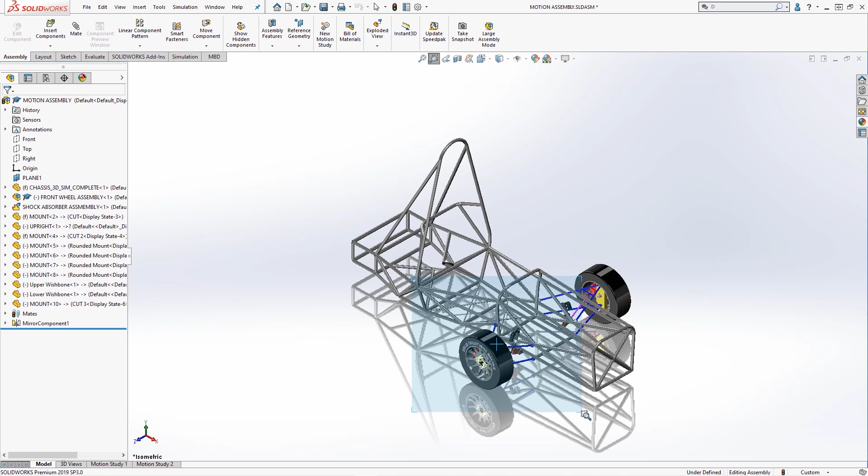Starting with an assembly model, we can focus in on the front right corner of the vehicle and hide the mirrored components. We'll section the model using the front and right planes to make it easier to see the components.

Taking a closer look at the suspension assembly, we see that the double wishbone arms in blue are connected to the chassis. Mounting tabs have been included to mount the orange bell crank rocker to the wishbones and shock absorber.

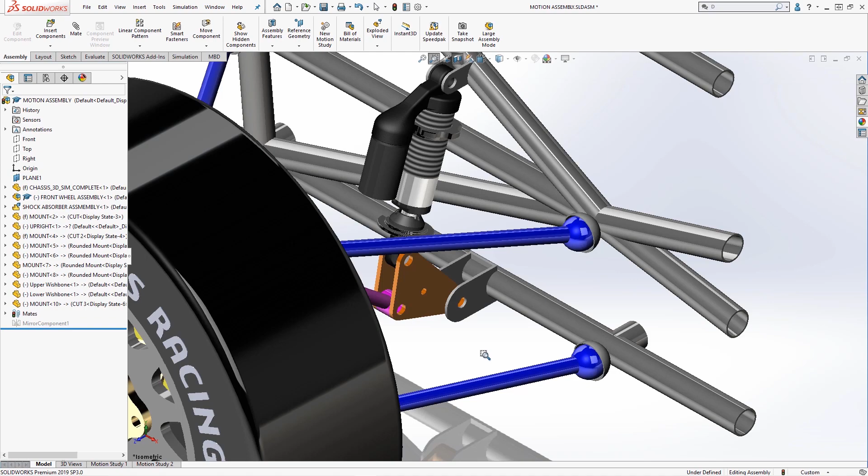Wishbone mounting points have been represented as simplified ball and socket joints for the analysis to allow for a full range of motion. The physical shock absorber spring has been excluded from the assembly, as this can be represented as a virtual simulation element using the simple spring equation, but can also consider fluid damping, thus negating the need to model the geometry.

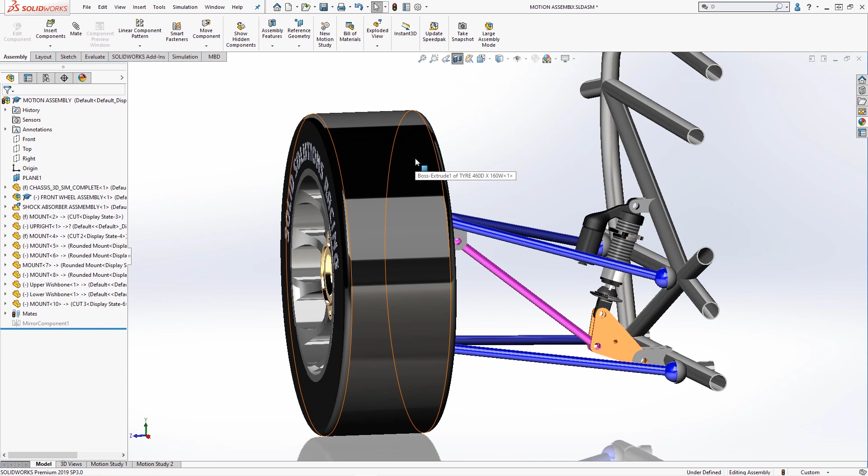We can also see the purple rocker linkage if we rotate around the model, and the wheel assembly itself. Hiding the tyre and wheel, we see a simplified body representing the design envelope for the upright knuckle, shown in yellow.

The brake caliper and hub axles are mounted to this body, which will be optimized in the next section. Ball joint connections are also modelled here to streamline the motion study setup.

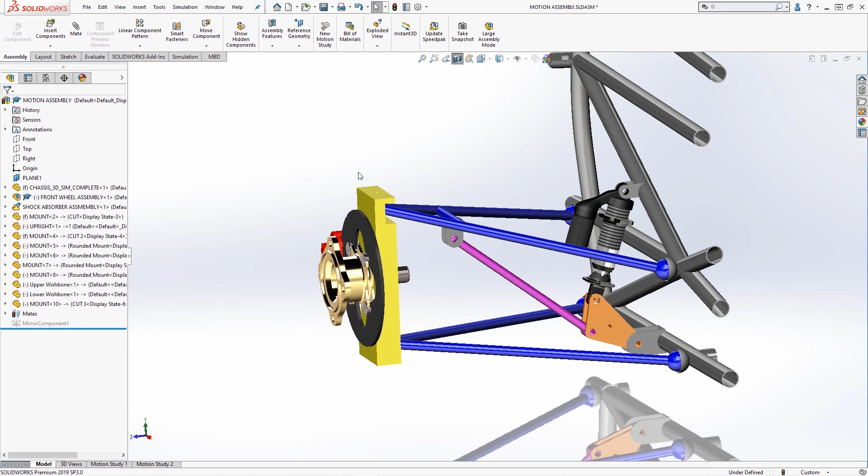We'll unhide the component we hid earlier by using a handy little button on the assembly toolbar, and this completes the geometry review. We can test wheel clearances and suspension travel by moving the wheel to ensure all components are mated correctly. These mates will automatically be converted to motion study joints, avoiding tedious manual setup.

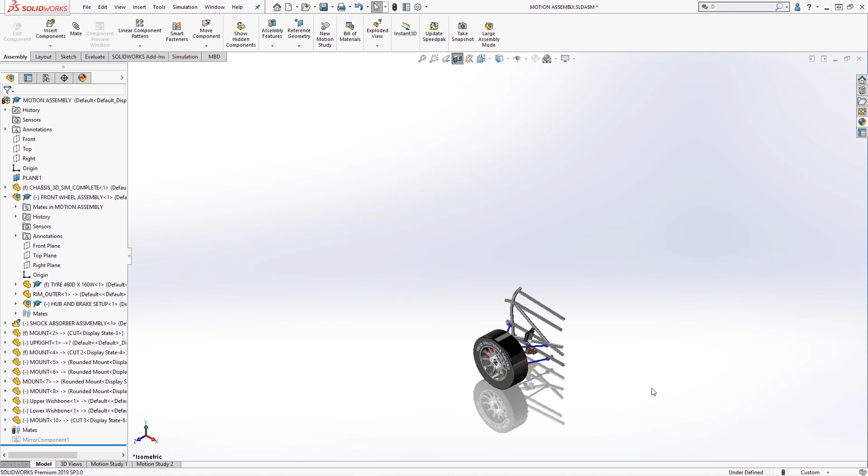To create a motion analysis, navigate to the Assembly tab and insert a new motion study. Ensure the motion add-in is enabled first if the options are not visible.

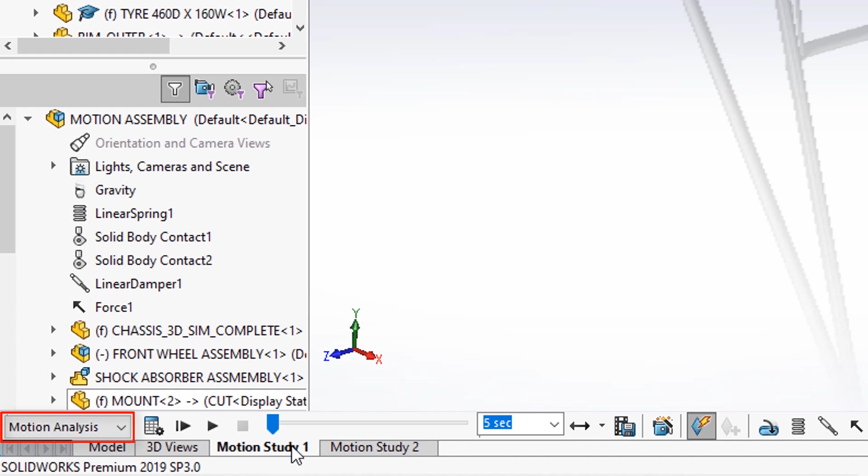All motion study tabs are shown at the bottom of the viewport, and clicking on a study name will split the pane and show a custom motion-specific feature tree. Be sure to change the study type from animation to motion analysis for a full feature set.

This particular study has a number of pre-applied conditions which are listed. We can calculate the response using the toolbar option on the left and add additional simulation elements and conditions by working from left to right.

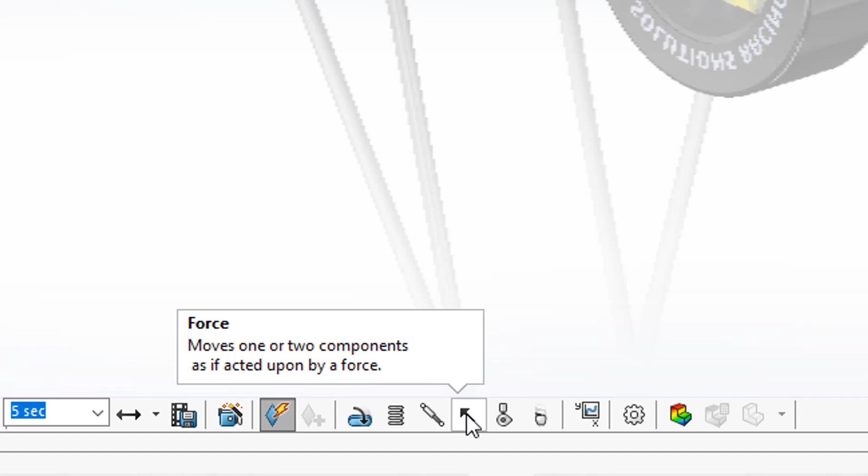Options to add motors and actuators, springs, dampers, forces, contact and body forces are available. We'll step through the setup. Gravity is applied to the global Y direction, but this could be modified and flipped to simulate a constant and uniform acceleration load.

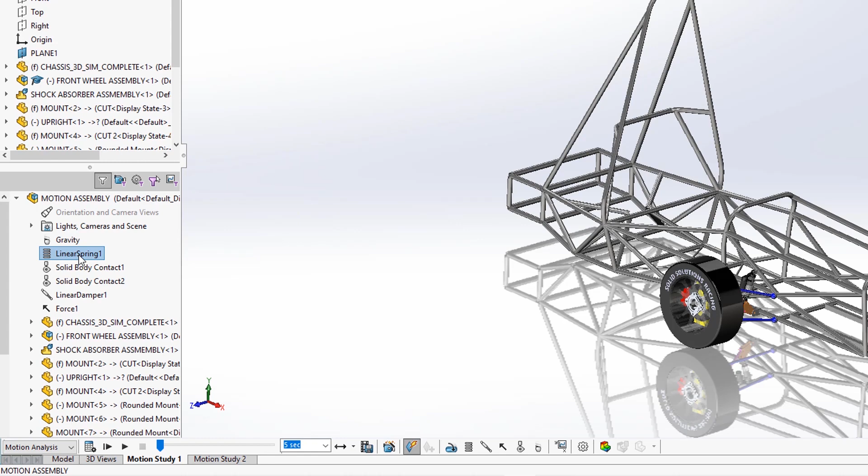A virtual spring connector has been created with a linear spring stiffness and two load-bearing faces selected. Damping can also be turned on here, but we have created an explicit damper between the same two faces with a damping coefficient to control this independently.

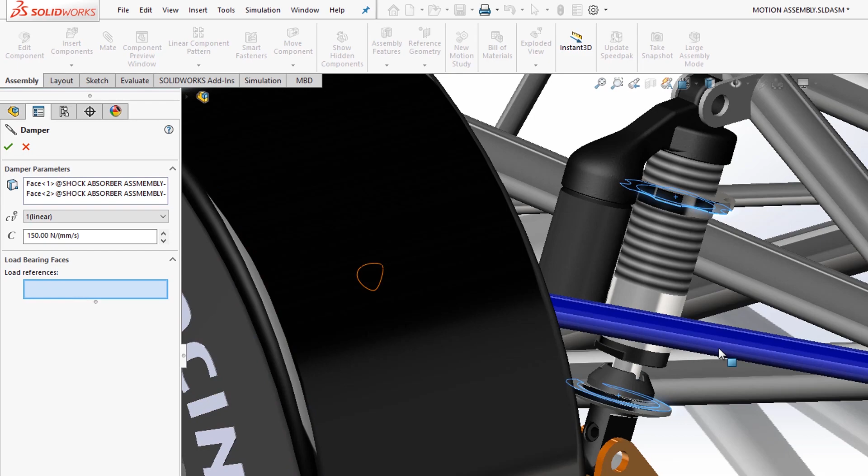Solid body contact between the wishbone and the upright has been set to steel dry, and this is true for both the upper and lower wishbones. We can extract the contact reaction forces correctly using this method, and these are listed in the motion tree.

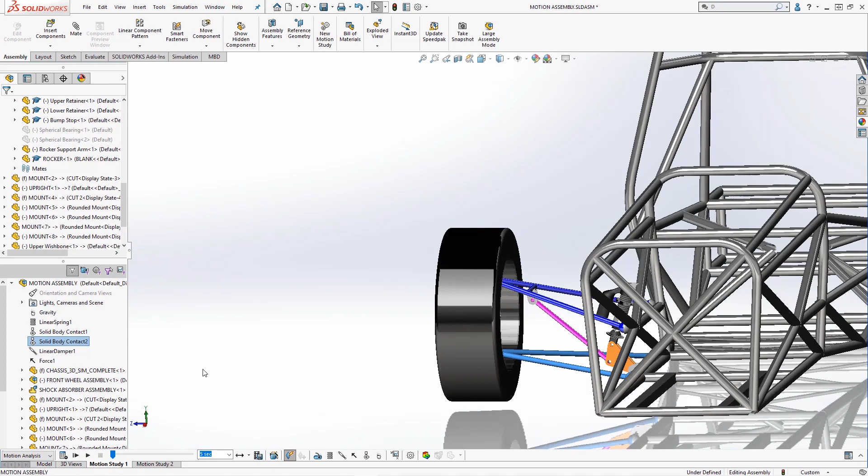A vertical force was added to apply loading on the wheel to simulate a bump impact. A custom driving function of force versus time was used, and the data has been imported from an Excel sheet.

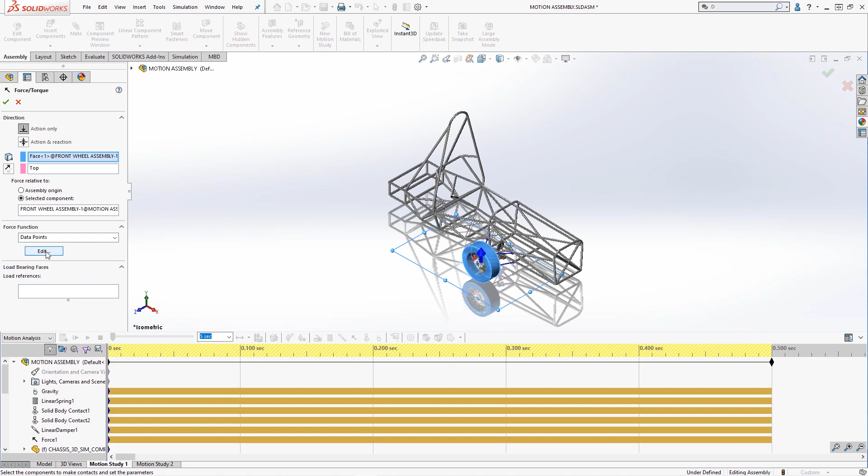In this particular instance, the acceleration data was obtained by mounting a mobile phone to the engine bay of a vehicle near the shock top mounts and capturing acceleration data using a data logging app.

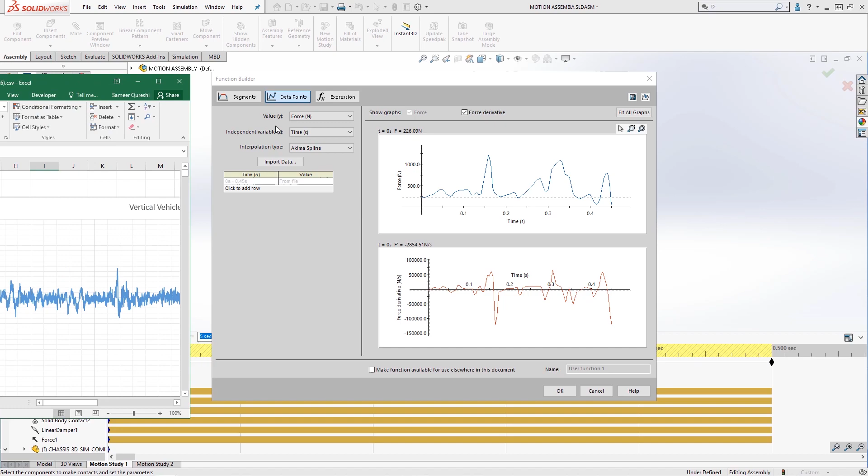The acceleration in the Z direction from the app corresponded to the vertical Y acceleration of the chassis. This was imported directly into Excel and rearranged by multiplying the acceleration by the mass acting over 1/4 of the vehicle to give an approximate force acting at the wheel.

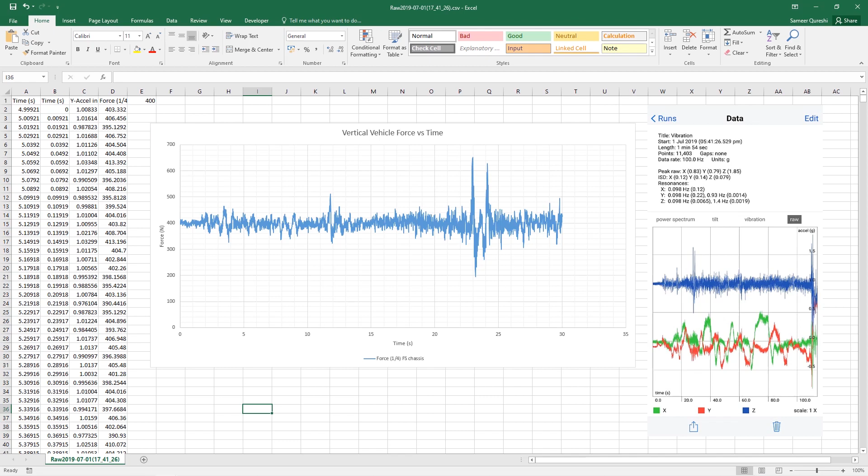Notably, the vehicle the data was extracted from was much larger than the Formula Student chassis, but the analysis methodology is still the same.

A small subsection of the data has been extracted to show the vibration loading for 0.45 seconds. We will use this data in the motion study by importing the raw data from a .csv file. The first column represents the time in seconds and the second column represents the force experienced in newtons.

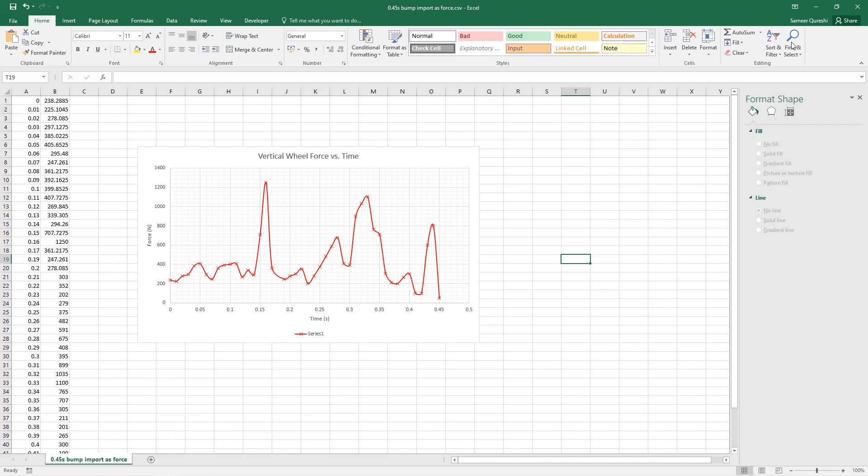This data is imported into the force function builder and we can calculate the motion. Notice how the wheel responds to the dynamic input.

We can scroll down to the results folder where results will be stored. Clicking the XY plot, we can extract the wheel's linear displacement in the Y direction over the loading time and choose to show a vector arrow graphic in the viewport.

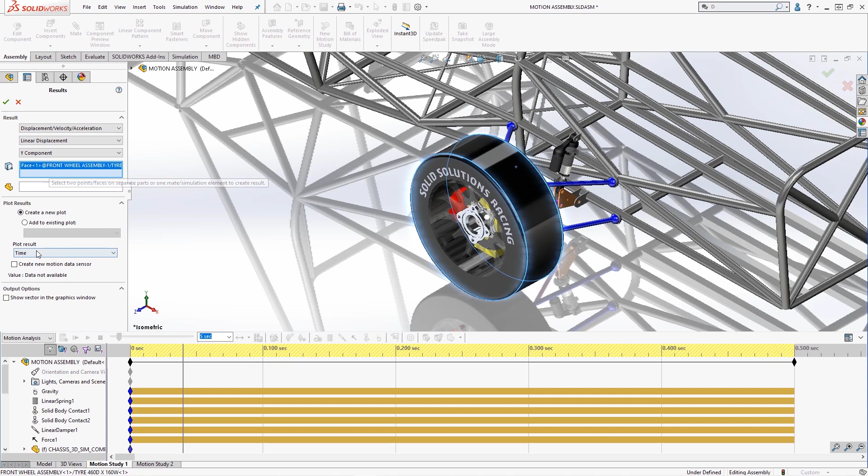We are presented with a plot of the linear displacement over time and can play this back. Ignore the displacement scaling as the input data was obtained from a much larger vehicle. Gravity is enabled and not all materials are applied to components.

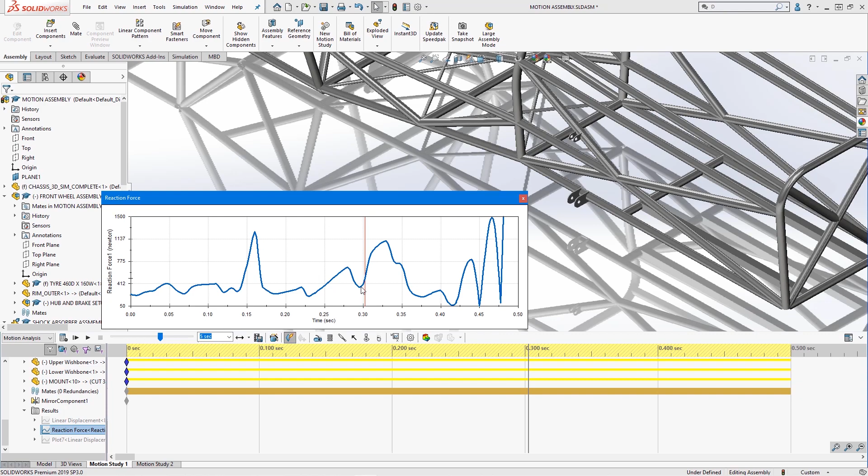Navigating back to the results folder, a previously created reaction force graph shows the forces experienced at the wheel knuckle upright, which will be used in the next phase, and the vector on screen shows the force loading graphically. Other plots that are available include energy, pitch, yaw and roll graphs, angular accelerations and much more.

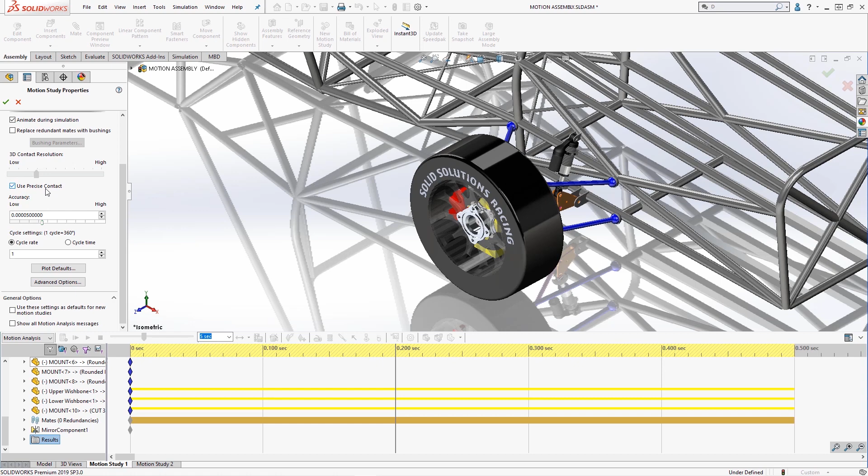Precise contact between pointy geometry and complex components can be used when the contact resolution slider cannot reach an adequate solution. More advanced options control the solver integration type, with the W-stiff solver being better suited for reducing errors, improving accuracy, and updating solver constants at each step size, which can be modified.

We can now take the forces we obtained and import them into the next phase.